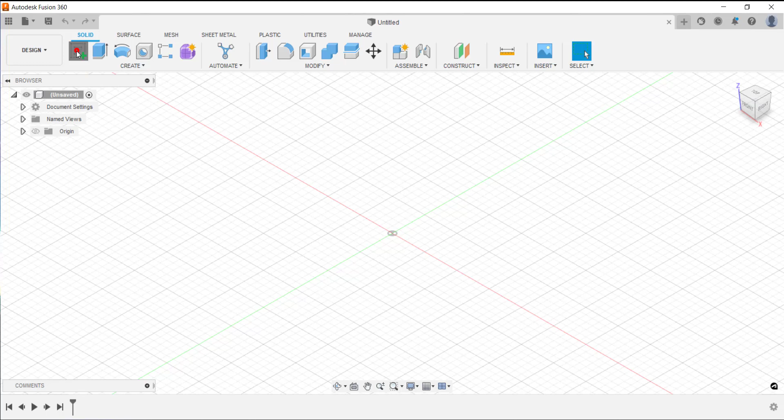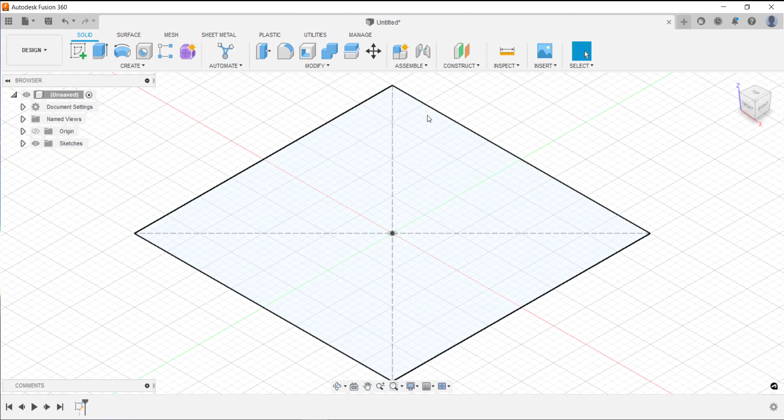So I'm just going to create a square using a center rectangle, and I'm just going to make this 200 by 200. What I'm then going to do is create an offset plane from the XY plane. I'm just going to position this 300mm above.

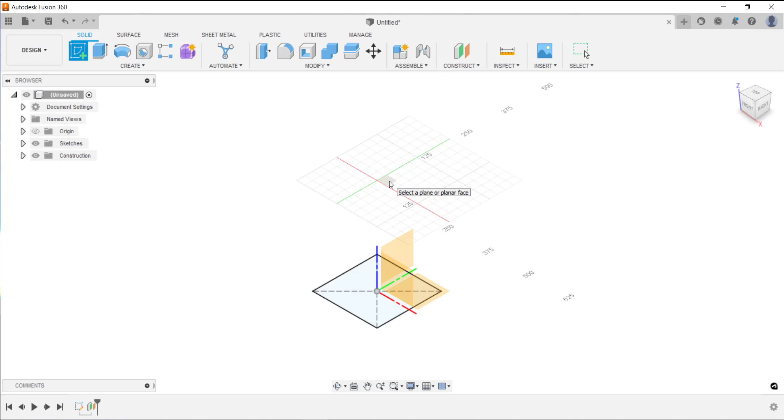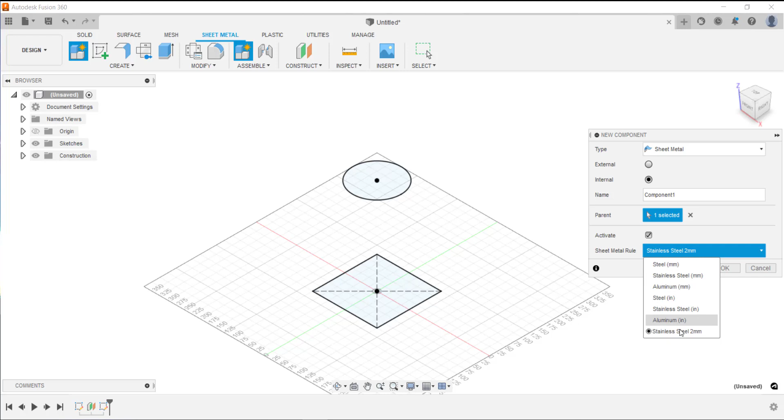And what I'm now going to do is create another sketch on that plane that I've created the offset on, and I'm just going to put a circle in at 150. So we can see now that we've got two sketches. So what I can do is I can go to the sheet metal tool and create a new component of that sheet metal, and in here we can choose our material size that we want to use. So I'm just going to go with the stainless steel 2mm in this instance and click OK.

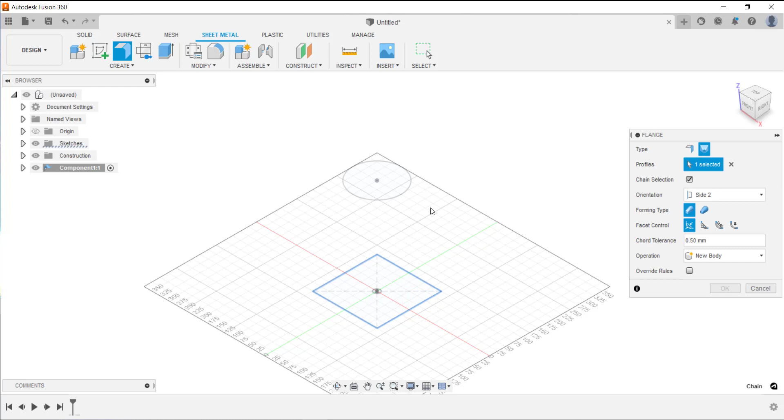So now that I'm in the sheet metal tool, what I can now go and do is go to the Flange tool here, and we can see that we've got a Lofted Flange option. So what I can do is I can click on the bottom sketch first, the square, and then the second sketch, the circle, and we can see that we get a preview.

Now we have some options available in here as to how this is created. So we can do this as either a brake form, so in other words use a press brake to create the form required. And the other option we have here for forming type is die form. So if we're working with a stamping die to create it, you can see we get a different result. So the type we're going to look for here is brake form.

Now it's also worth pointing out in here as well that we have different options available. So we can have chord tolerance where we can give it a size. We can also do a facet angle where we can change the angle size, and you can see it will put more facets in as required. We've also got facet distance as well, so again if we drop that number down, you can see that it will put more facets in, and we've also got a facet number as well. And you can see it can make quite a bit of difference as we go.

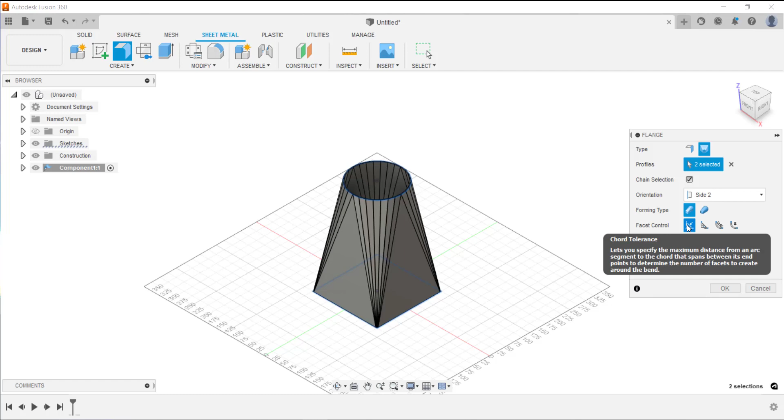Now what I'm going to do here is just go for chord tolerance, and the other thing that we need to pay attention to here is the orientation. Now this is quite an interesting one, because if we have this set up the wrong way, the sizes won't come out as you expect. So at the moment you can see with side one, if you zoom in, you can see that you're working to the outside of your geometry that you've created for the two sketches.

So what you want to be doing here is go to side 2, which will actually bring it inside of those sketches that we've created. The other option that is available as well is center. So what that will do is put half the material on one side of the line and half the material on the other side of the line, as we can see. But in this instance we're just going to go side 2.

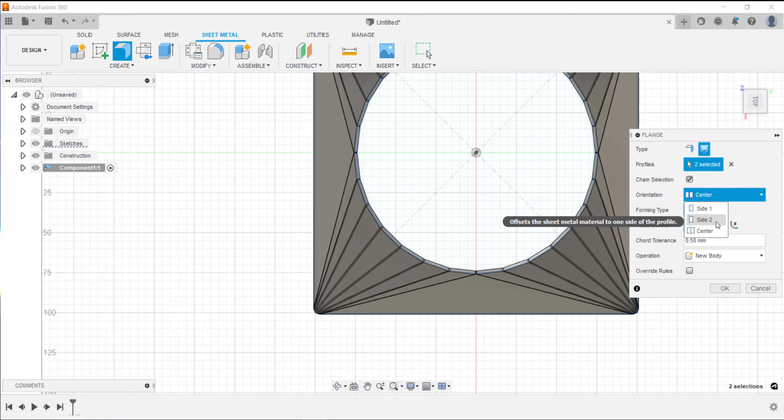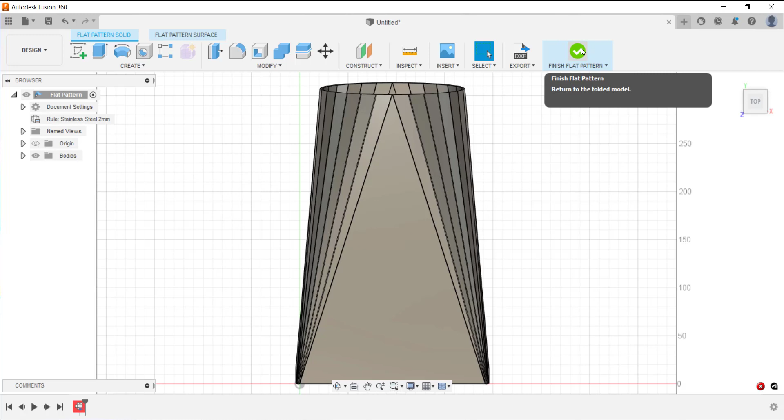Now the one other thing that we've got to do here, if we try creating a flat pattern at the moment by clicking on a face, you will notice that we get an error. The reason we get an error is because the software doesn't know how to create the flat pattern. So what we have to do here, if I go to construction and just turn on that plane that we created, we're going to draw a sketch on plane 1.

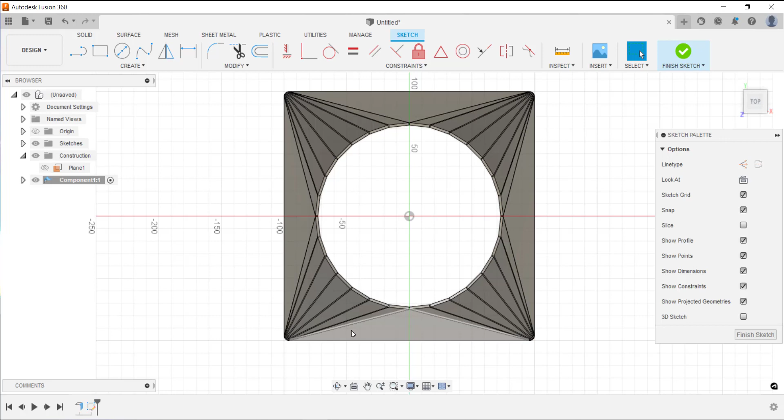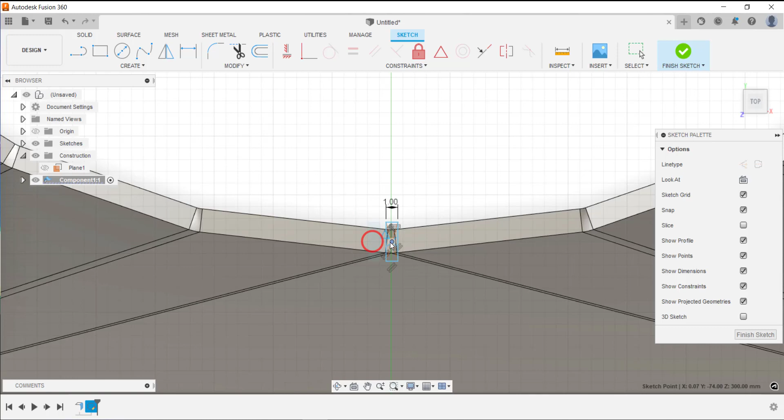We're just going to zoom in, and I'm just going to go over to a rectangle, a 3-point rectangle, center, like this. And we're going to give it a width. We're not going to make it too wide, and I'm going to drag that to the center, by the green line, which represents Y. And then I've got to make sure that this rectangle has enough height so that we can actually go through the whole part.

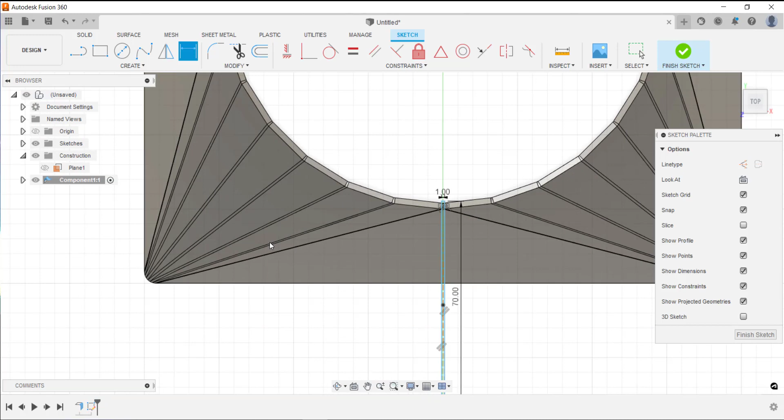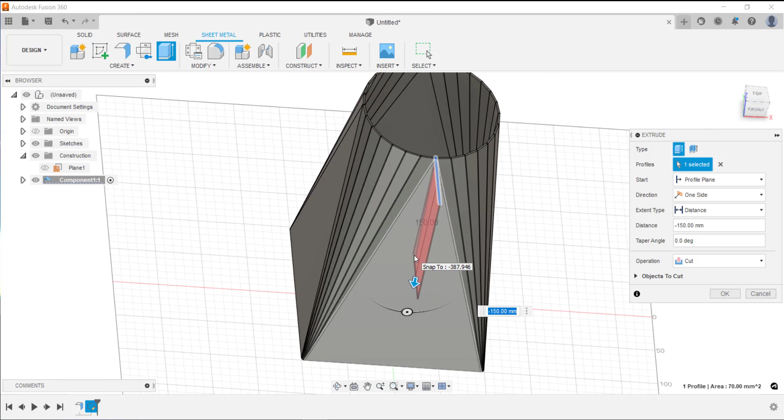So if we have a look here, we can see that that sketch is going right the way through. So that will cut through. So if I go finish sketch now, what I can then go and do is create an extrude. And what we want here is to drag it down so it cuts right the way through. Just going to make sure that's going down enough so it cuts through the part.

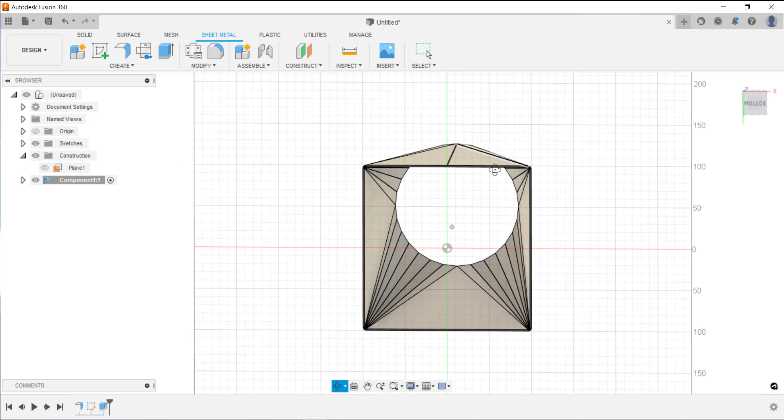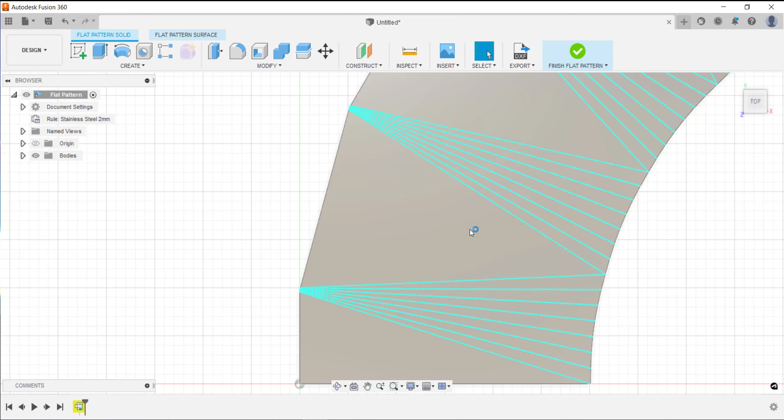What you'll now notice is that we've now got a line. If we go and zoom in, we can see that that's cutting all the way through. Now, what we have to do next is go in and do a flat pattern again, but this time click on that face, and this time round it's now going to create us our flat pattern, which looks a little like this.

So at this stage we can now export this shape out if we want to as a DXF, and we've got the option of converting splines into polylines as well, and we can just save this locally onto our PC.

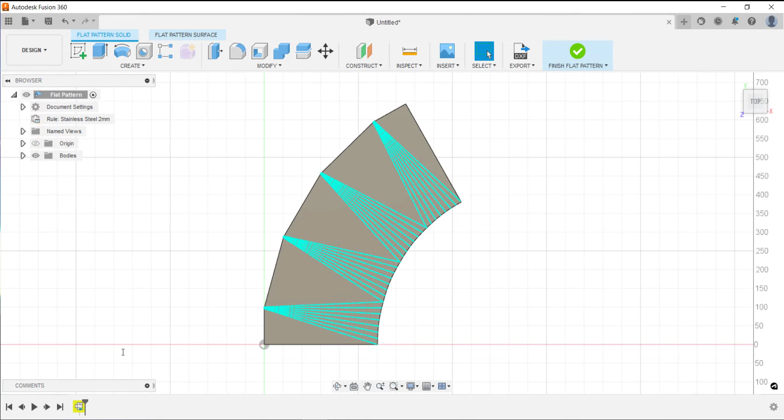So in this video we've had a look at creating a lofted flange with a closed profile using the Flange tool in Fusion 360.